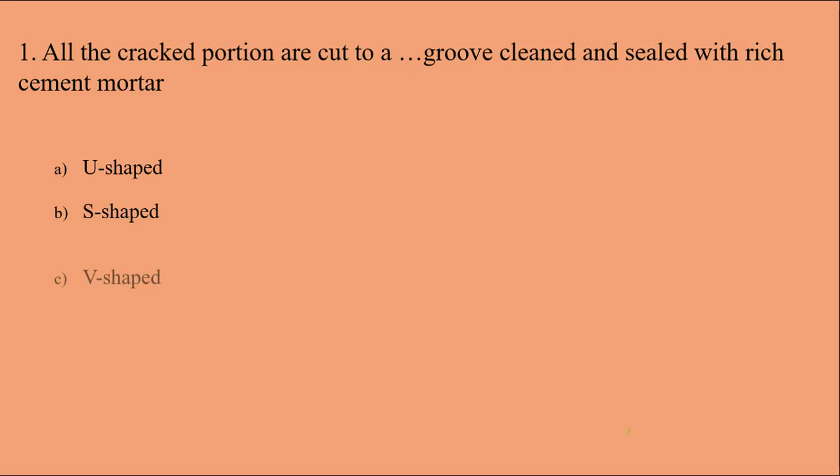So let's start with the answer key of Maintenance and Repair of Structures. Question number 1: All the crack portions are cut to a dash groove, cleaned and sealed with rich cement mortar. Option A U shape, option B S shape, option C V shape, option D Z shape. The right answer is V shape.

Question number 2. In the carbonation test, carbonated concrete shows the color as option A grey, option B yellow, option C pink, option D red. The right answer is pink.

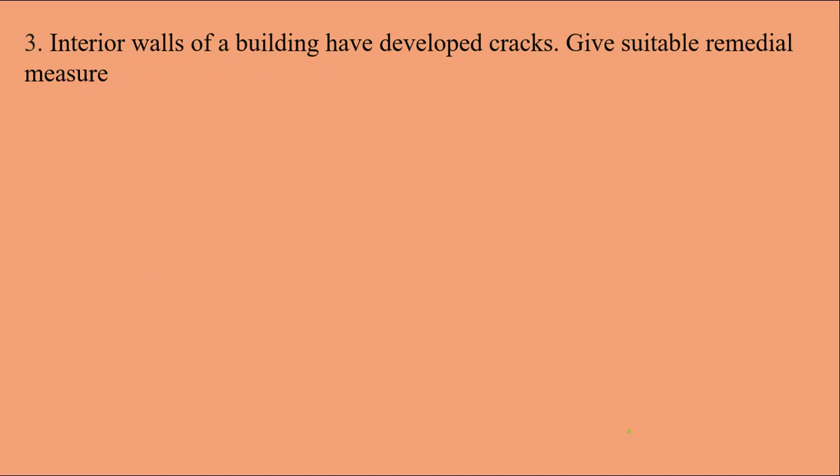Question number 3. Interior walls of a building have developed cracks. Give suitable remedial measures. Option A fill cracks by cement mortar. Option B fill cracks by bitumen. Option C use waterproofing compound. Option D fill cracks by sand. The right answer is fill cracks by cement mortar.

Question number 4. The cracks which are less than 1 mm in masonry work are called as option A medium crack, option B wide crack, option C thin crack, option D extra wide crack. The right answer is thin crack.

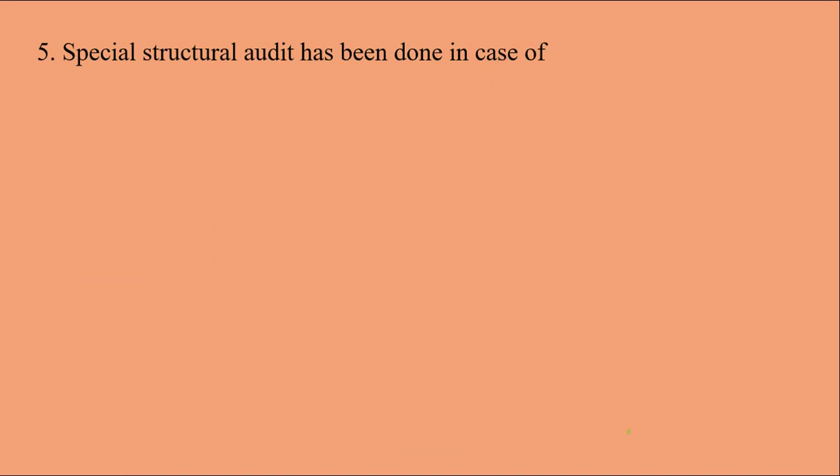Question number 5. A special structure audit has been done in case of option A age related damage, option B change of user, option C regular audit, option D none of these. The right answer is age related damage.

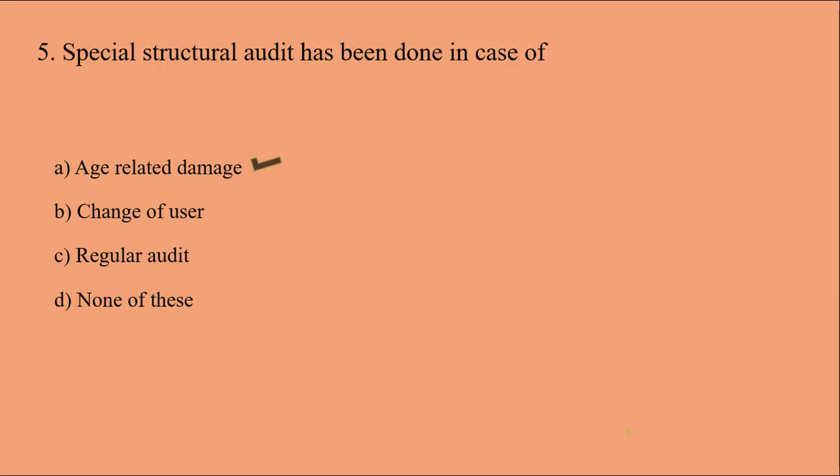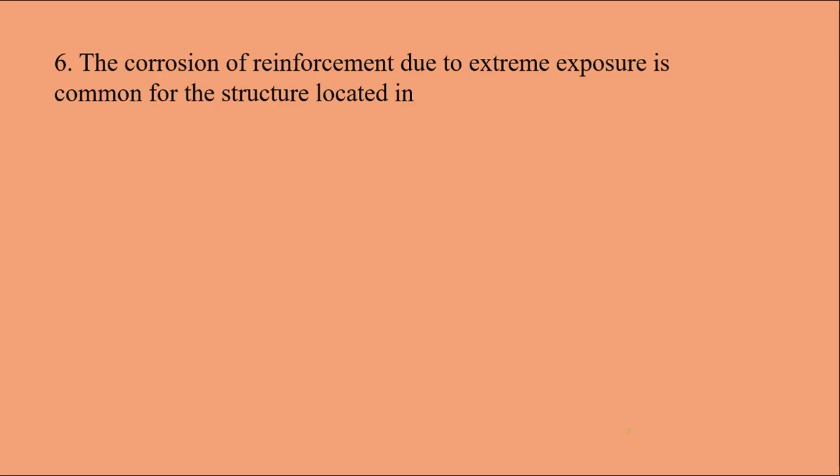Question number 6. The corrosion of reinforcement due to extreme exposure is common for the structure located in option A dry condition, option B coastal zone, option C regional zone, option D hot condition. The right answer is coastal zone.

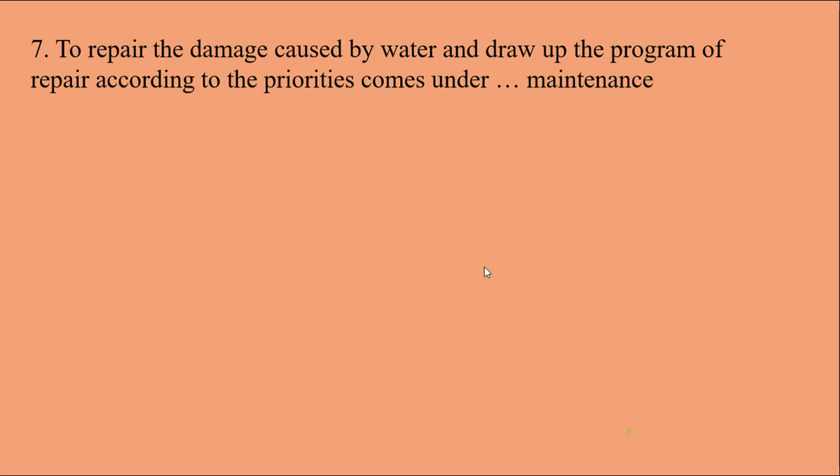Question number 7. To repair the damage caused by water and draw up the program of repair according to the priorities comes under dash maintenance. Option A post monsoon, option B special, option C pre monsoon, option D remedial. The right answer is post monsoon.

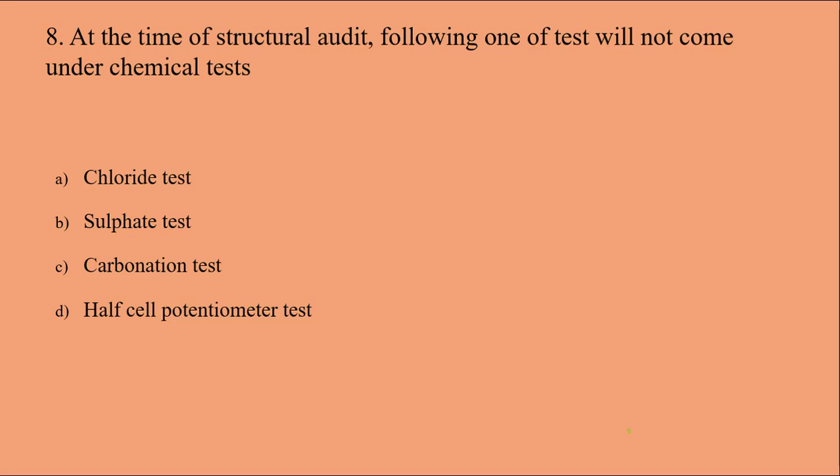Question number 8. At the time of structure audit, the following one of the tests will not come under chemical test. Option A chloride test, option B sulfate test, option C carbonation test, option D half cell potentiometer test. The right answer is half cell potentiometer test.

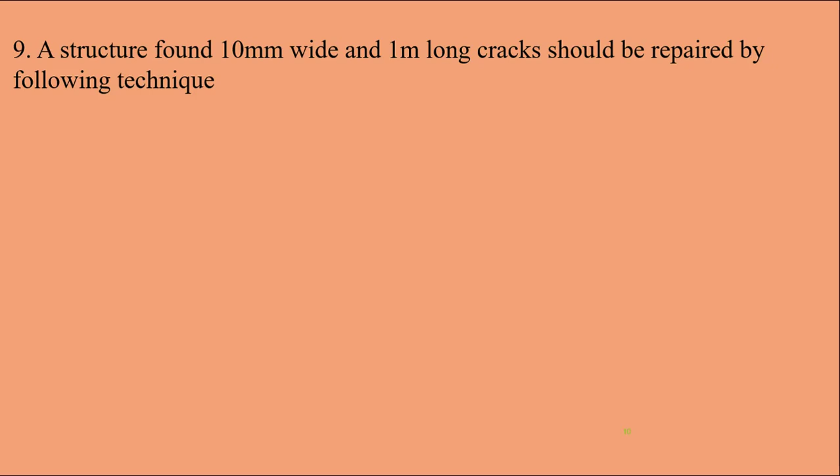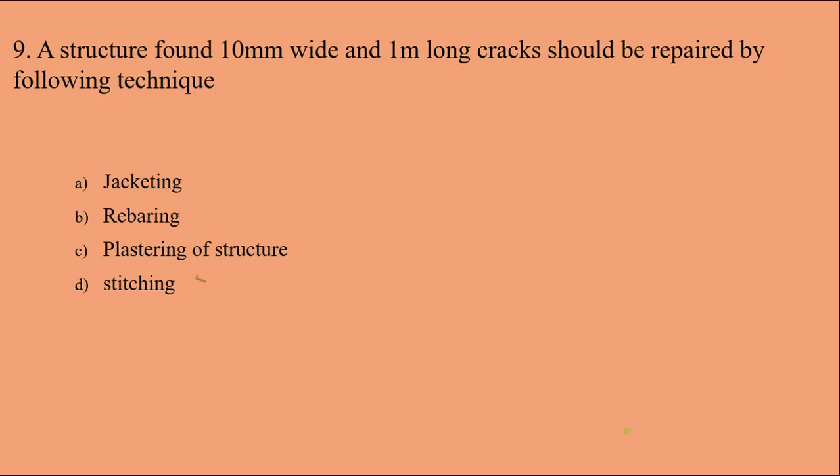Question number 9. A structure found with a 10 mm wide and 1 meter long crack should be repaired by the following technique. Option A jacketing, option B rebarring, option C plastering of structure, option D stitching. The right answer is stitching.

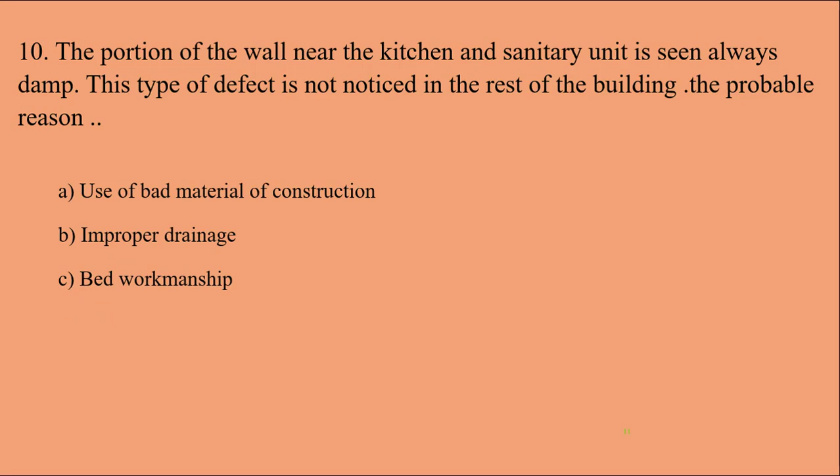Question number 10. The portion of the wall near the kitchen and sanitary unit is seen always damp. This type of defect is not noticed in the rest of the building. The probable reason: option A use of bad material of construction, option B improper drainage, option C bad workmanship, option D effect of atmospheric agencies. The right answer is improper drainage.

Question number 11. If insufficient cover is provided to the reinforcement, in that case cracks develop are called as option A flexural cracks, option B tension cracks, option C corrosion cracks, option D shear cracks. The right answer is corrosion cracks.

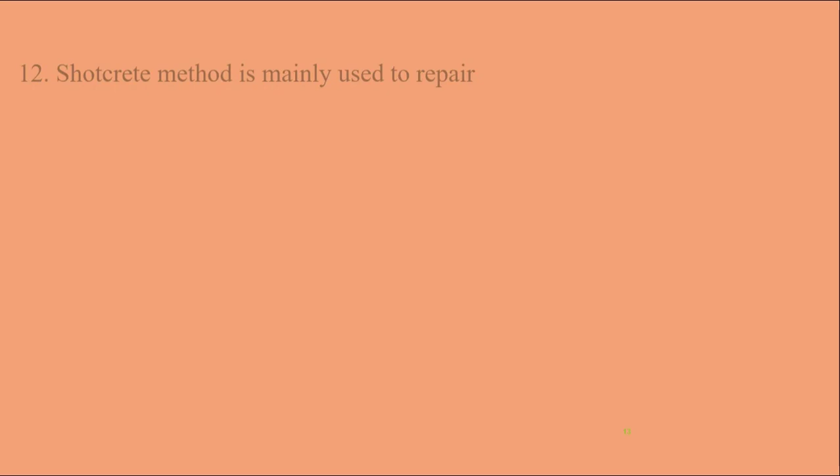Question number 12. Shotcrete method is mainly used to repair option A new brick wall, option B old brick wall, option C reinforced brick wall, option D all of the above. The right answer is old brick wall.

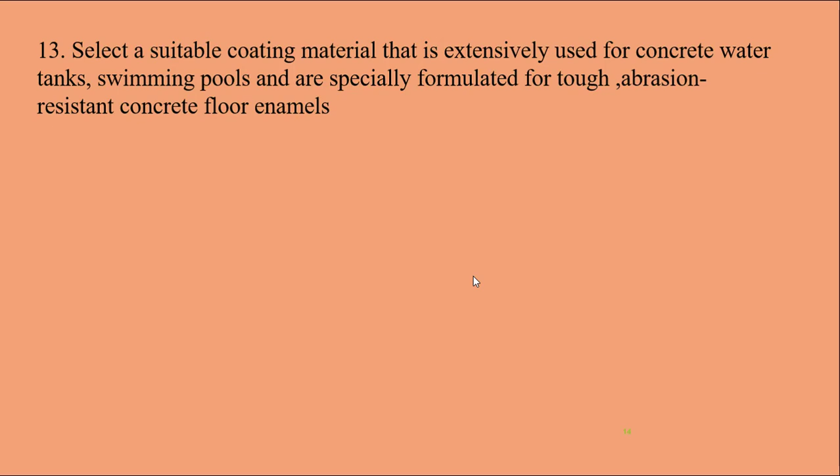Question number 13. Select a suitable coating material that is extensively used for concrete water tanks, swimming pools and is specially formulated for tough abrasion resistant concrete floor. Option A bituminous cutback, option B epoxy coating, option C chlorinated rubber coating, option D vinyl coating. The right answer is epoxy coating.

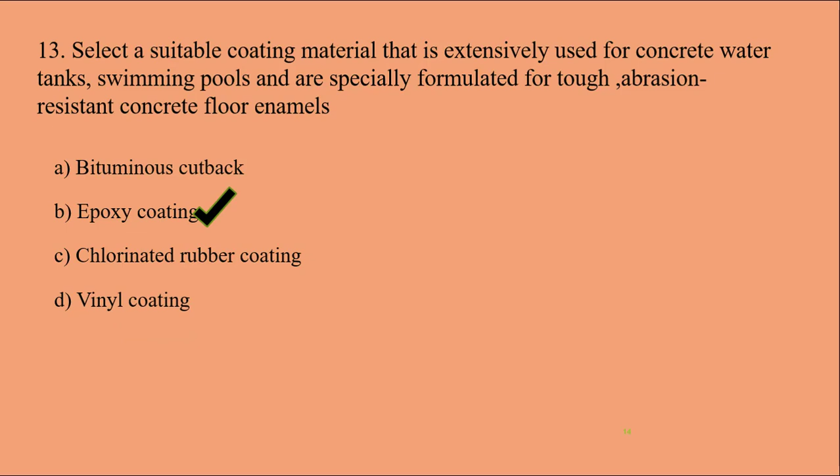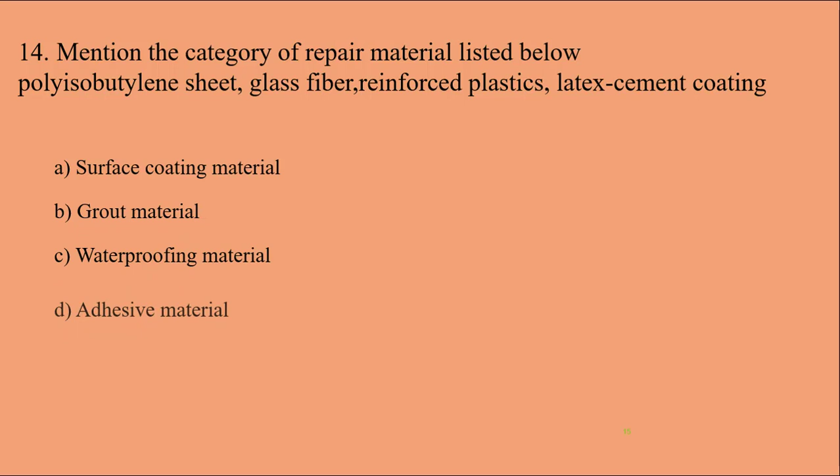Question number 14. Mention the category of repair material listed below: polyisobutylene sheet, glass fiber, reinforced plastic, latex-cement coating. Option A surface coating material, option B grout material, option C waterproofing material, option D adhesive material. The right answer is waterproofing material.

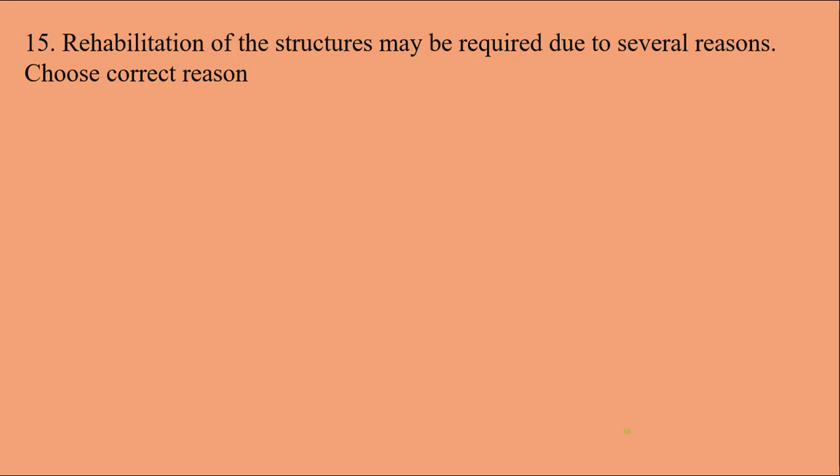Question number 15. Rehabilitation of the structure may be required due to several reasons. Choose the correct reason. Option A environmental effect, option B tensile effect, option C compressive effect, option D range effect. The right answer is environmental effect.

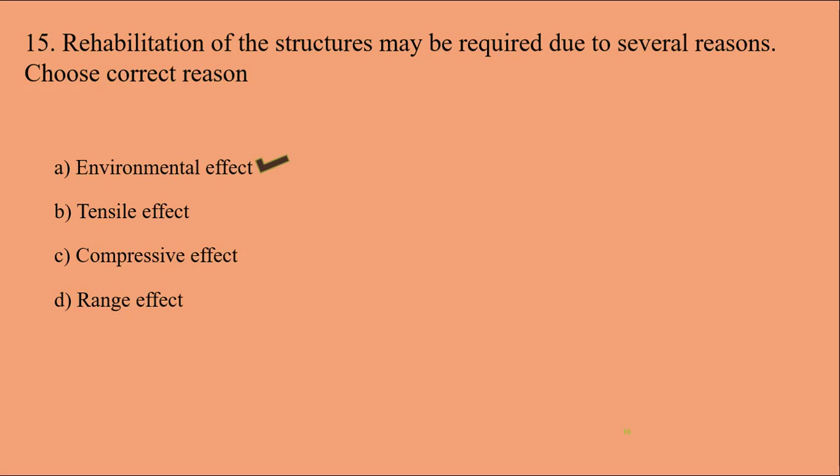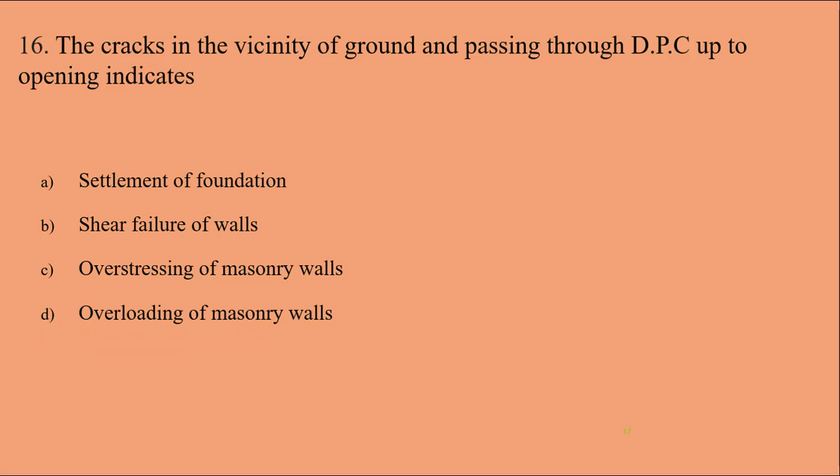Question number 16. The cracks in the vicinity of ground and passing through DPC up to opening indicates. Option A settlement of foundation, option B shear failure of walls, option C over-stressing of masonry wall, option D overloading of masonry walls. The right answer is settlement of foundation.

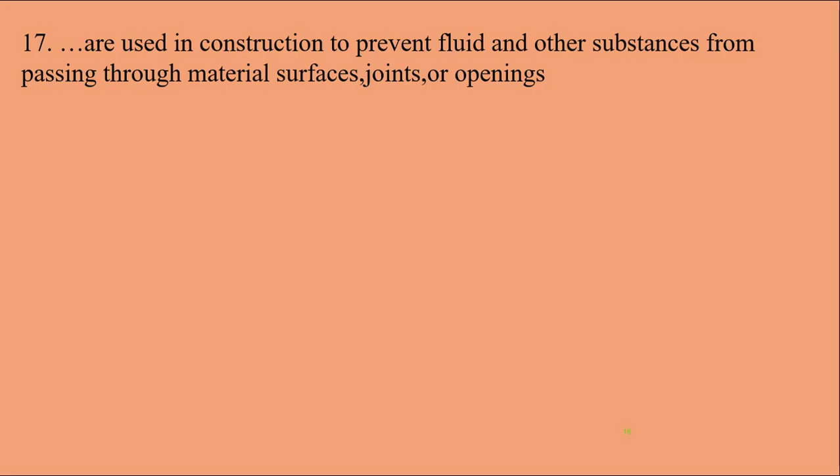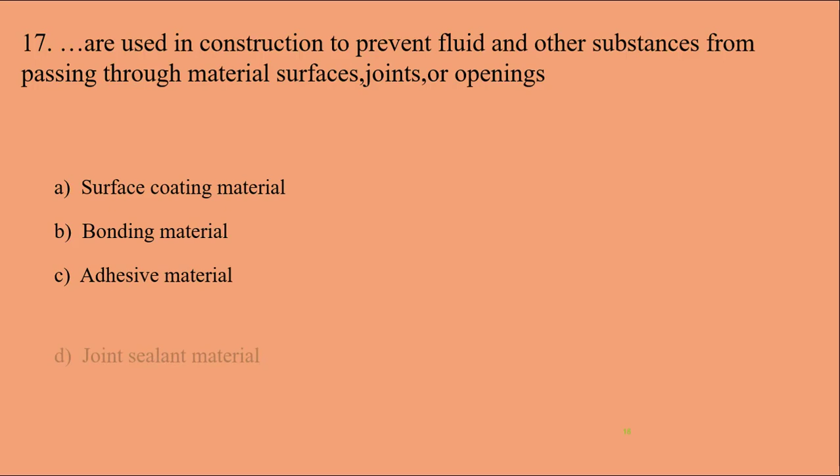Question 17: Dash are used in construction to prevent fluid and other substances from passing through material surfaces, joints or openings. Option A, surface coating material. Option B, bonding material. Option C, adhesive material. Option D, joint sealant material. The right answer is joint sealant material.

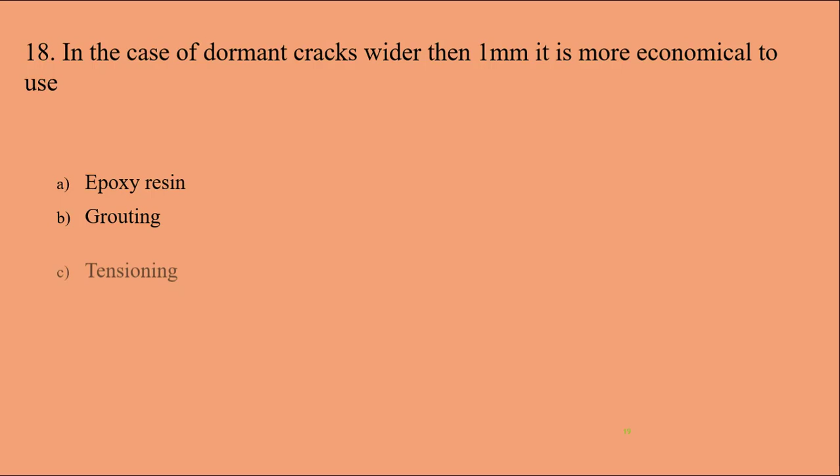Question 18: In the case of dormant cracks wider than 1 mm, it is more economical to use. Option A, epoxy resin. Option B, grouting. Option C, tensioning. Option D, ranging. The right answer is grouting.

Question 19: The maintenance work done to avoid defects occurring in the structure is called dash maintenance. Option A, remedial. Option B, prevention. Option C, routine. Option D, special. The right answer is prevention.

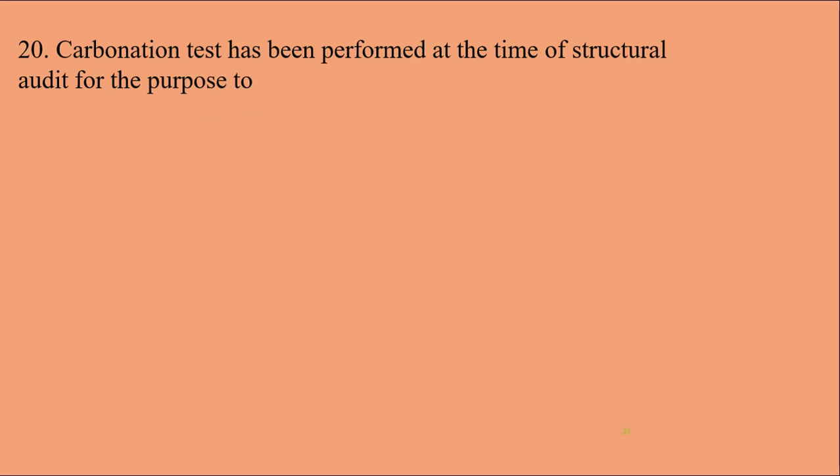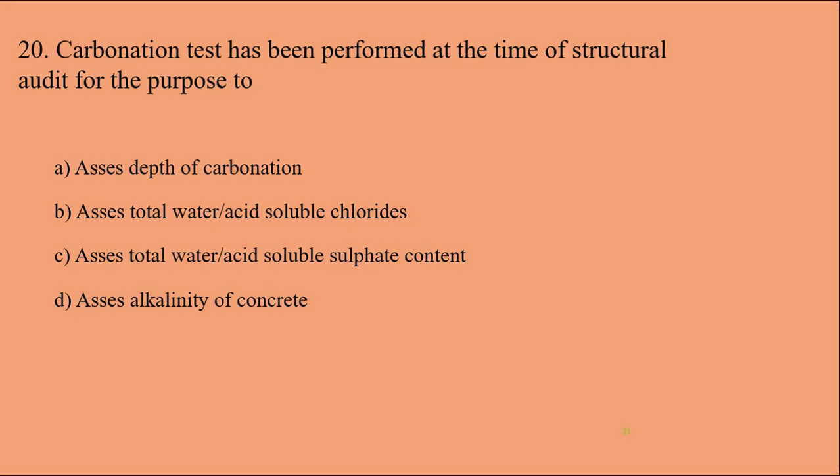Question 20: Carbonation test has been performed at the time of structural audit for the purpose to. Option A, assess depth of carbonation. Option B, assess total water acid soluble chlorides. Option C, assess total water by acid soluble sulfate content. Option D, assess alkalinity of concrete. The right answer is assess depth of carbonation.

Question 21: The cleaning of reinforcement thoroughly to remove all rust of bars can be done by. Option A, sand blasting. Option B, jacketing. Option C, shotcreting. Option D, rebarring. The right answer is sand blasting.

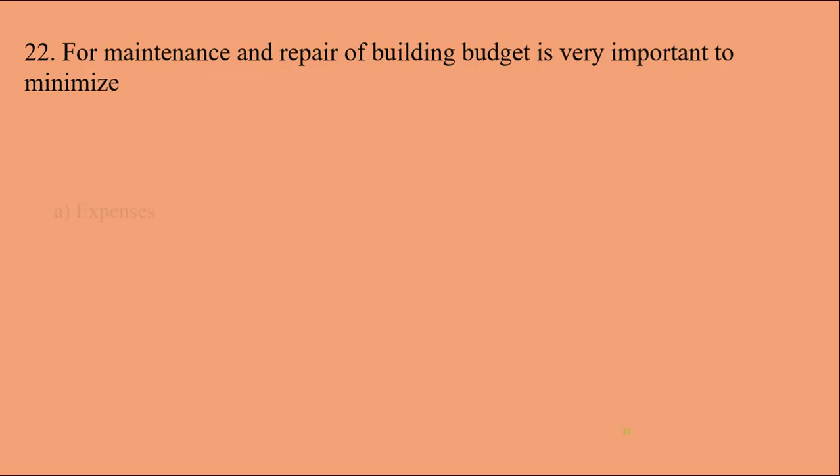Question 22: For maintenance and repair of building, budget is very important to minimize. Option A, expenses. Option B, saving. Option C, equipment. Option D, task force. The right answer is expenses.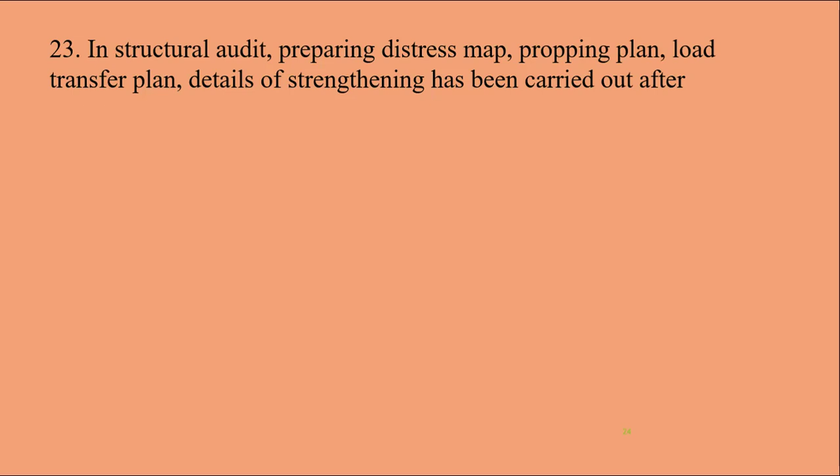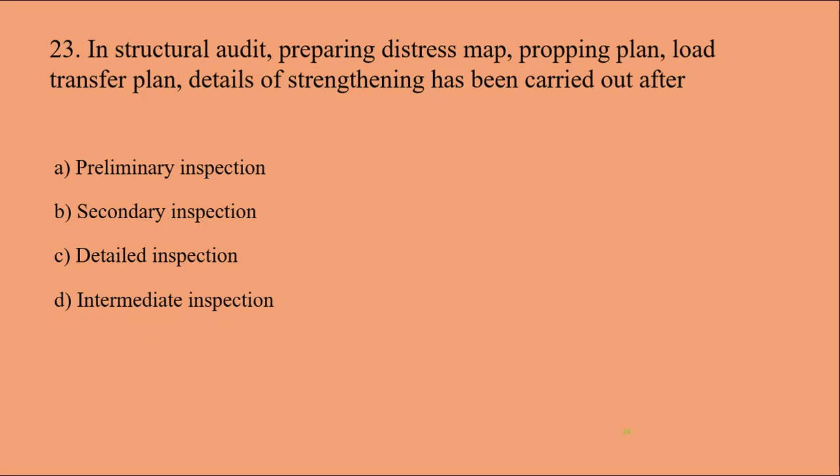Question 23: In the structural audit, preparing distress map, propping plan, load transfer plan, detail of strengthening has been carried out after. Option A, preliminary inspection. Option B, secondary inspection. Option C, detailed inspection. Option D, intermediate inspection. The right answer is detailed inspection.

Question 24: In masonry cases of heavily loaded members, shear distress is observed near the. Option A, edge. Option B, span. Option C, length. Option D, support. The right answer is support.

Question 25: The soil which is made up without compaction will have poor. Option A, bearing capacity. Option B, permeability. Option C, consolidation. Option D, compaction. The right answer is bearing capacity.

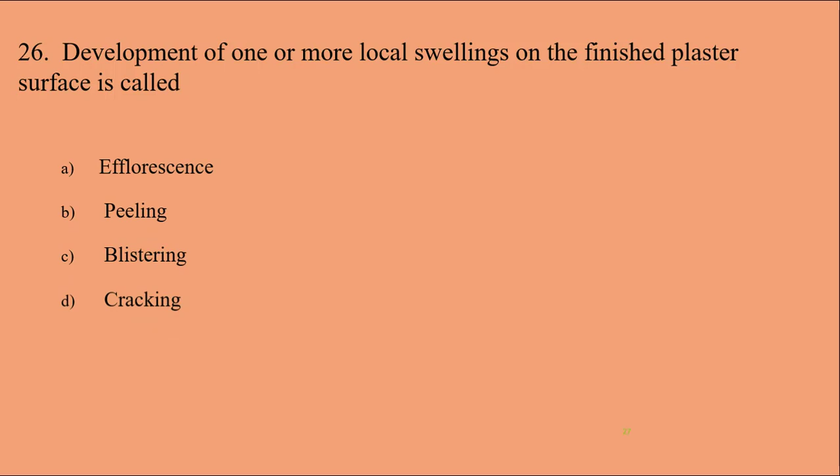Question 26: Development of one or more local swellings on the finished plaster surface is called. Option A, efflorescence. Option B, peeling. Option C, blistering. Option D, cracking. The right answer is blistering.

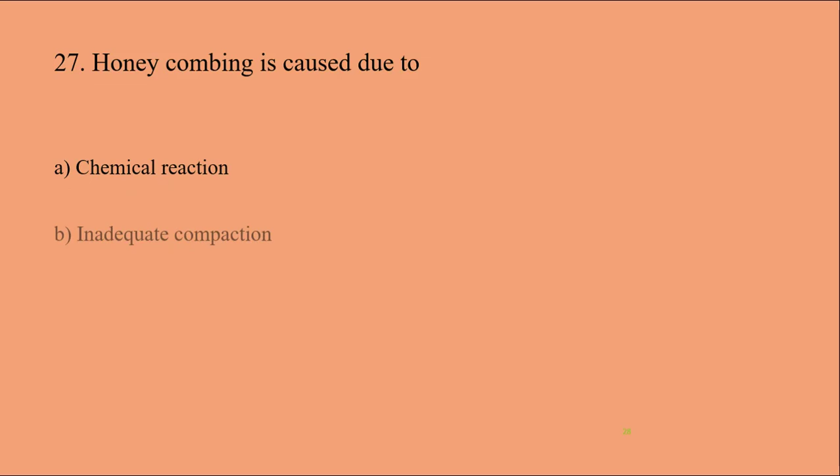Question 27: Honeycombing is caused due to. Option A, chemical reaction. Option B, inadequate compaction. Option C, lack of curing. Option D, shock waves. The right answer is inadequate compaction.

Question 29: Epoxy adhesives are used in the manufacturing of. Option A, glass. Option B, fabric. Option C, plywood. Option D, plastic. The right answer is plastic.

Question 30: Which technique is used to reduce soil settlement? Option A, stone column. Option B, piles. Option C, casting piles. Option D, all of above. The right answer is all of above.

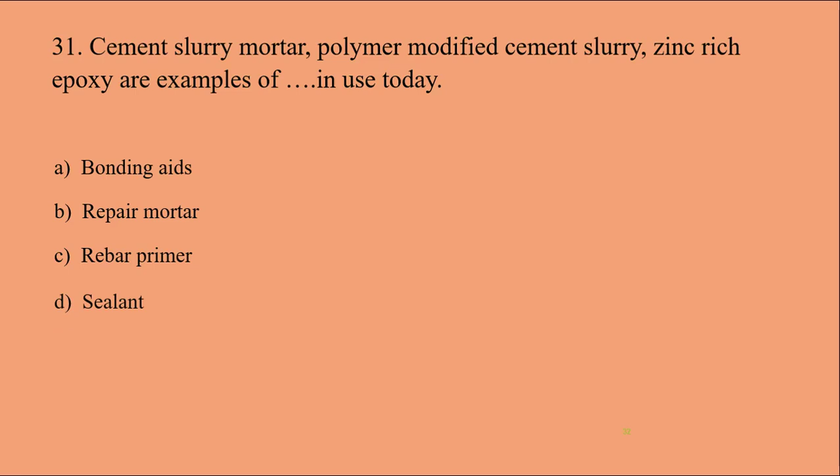Question 31: Cement slurry, mortar, polymer modified cement slurry, zinc rich epoxy are examples of dash in use today. Option A, bonding aids. Option B, repair mortar. Option C, rebar primer. Option D, sealant. The right answer is rebar primer.

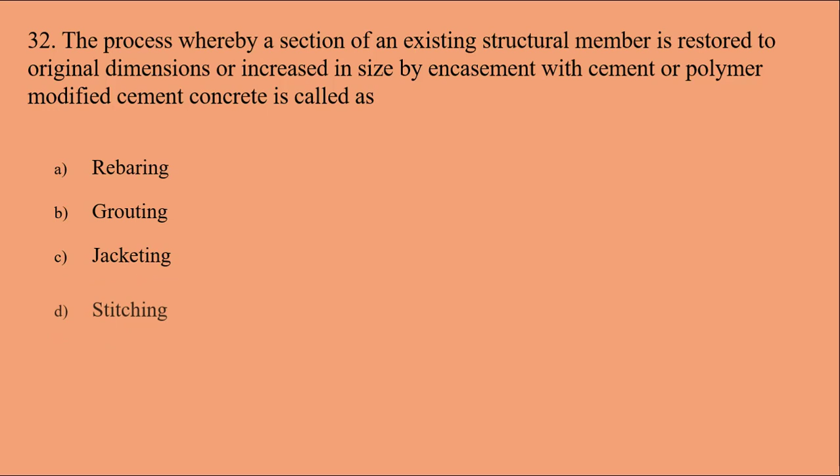Question 32: The process whereby a section of an existing structural member is restored to original dimension or increased in size by encasement with cement or polymer modified cement concrete is called as. Option A, rebarring. Option B, grouting. Option C, jacketing. Option D, stitching. The right answer is jacketing.

Question 33: When the concrete slab is to be extended on the side beam or slab whose dowel bars are not provided for extension purpose, then dash of the reinforcement can be done. Option A, stitching. Option B, rebarring. Option C, jacketing. Option D, grouting. The right answer is rebarring.

Question 34: The cracks developed parallel to the main reinforcement in RCC structures are called as. Option A, flexural crack. Option B, shear cracks. Option C, tension cracks. Option D, corrosion cracks. The right answer is corrosion cracks.

Question 35: Structural audit of buildings is necessary to identify shortfall in structure, and it is also important to suggest. Option A, strengthening and repair scheme. Option B, importance of financial audit. Option C, estimated cost of building. Option D, none of the above. The right answer is strengthening and repair scheme.

Question 36: The process of maintaining the structure and its components to keep it functioning at an optimum condition is called dash maintenance. Option A, corrective. Option B, emergency. Option C, preventive. Option D, periodically. The right answer is preventive.

Question 37: Dash are provided to steel reinforcement and structural steel to enhance resistance against corrosion. Option A, rebar primer. Option B, adhesive material. Option C, sealant. Option D, grout material. The right answer is rebar primer.

Question 38: To control corrosion, concrete with dash is used. Option A, low permeability. Option B, low thermal coefficient. Option C, more cement content. Option D, more coarse aggregate. The right answer is low permeability.